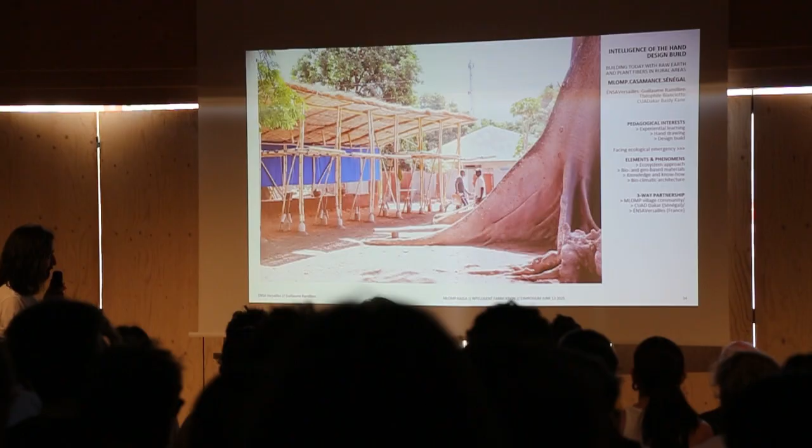So it's a three-way partnership that we've lived since many years now, with the Architecture School of Dakar in Senegal, our school here in Versailles, and now for 3 years with a village community in Senegal, a village called Mlomp Kassa.

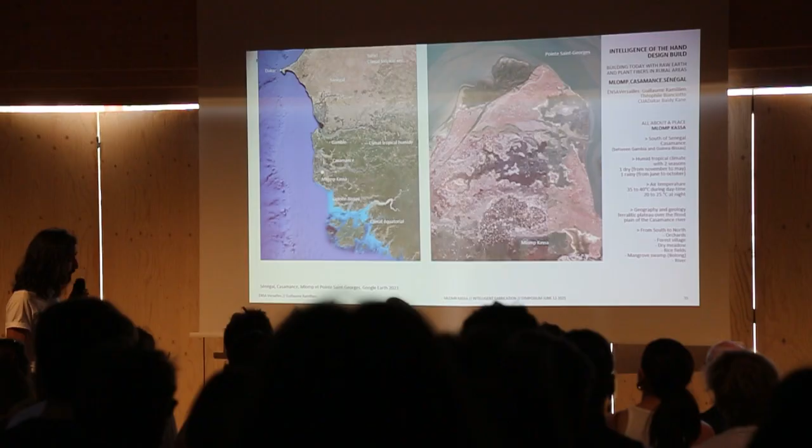With very high temperature, it can be 35 to 40 degrees in the daytime and 20 to 25 degrees at night. Also, the geography is interesting because it's a ferralitic plateau just above the Casamance River plain.

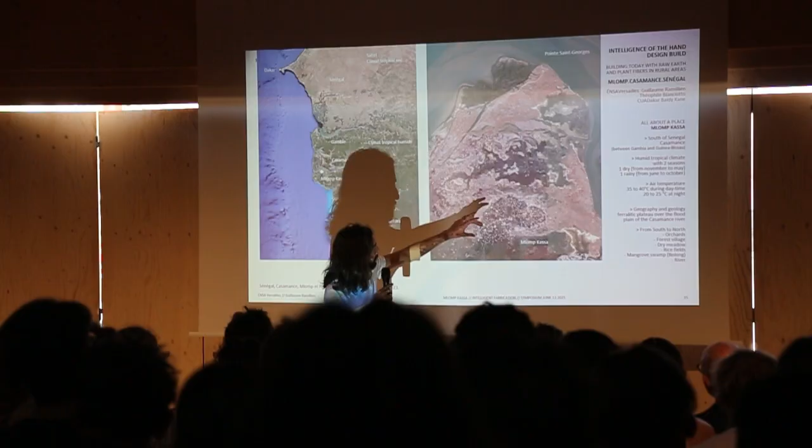So you have very different landscapes in a very small area: orchards, this forest village we work in, dry meadow, rice fields, and mangrove swamps nearby the river, they call it Bolong, and the Casamance River.

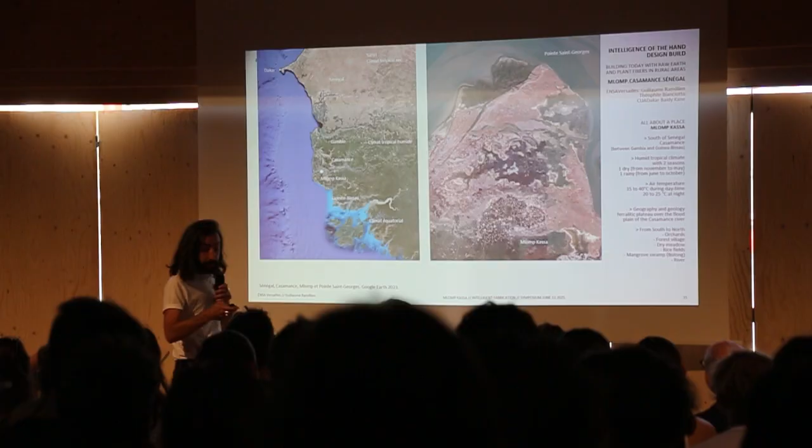Actually, it's not really a village, but a kingdom made of 5 villages. They have a king. It's called the Pays Kassa, it's the cradle of the Diola ethnic group and culture, which is very interesting.

Actually, they call themselves Christians, but only on Sunday morning. The rest of the time they are animist, so it means a very deep environmental culture and knowledge, very interesting for students. It's a rare place, living of farming and fishing, very simple.

And there are some very strong constructive traditions with local materials like raw earth and plant fibers. That's why we work with them.

So the idea is really to learn from this, now, in the context of global warming and ecological climate crisis. It's also a place that has a very unique architecture, very interesting with raw earth.

These 2-story buildings are unique, built with a technique called banco, what we call bauge in France. It means raw earth used in a plastic state, stacking layers, then cutting it so it's straight.

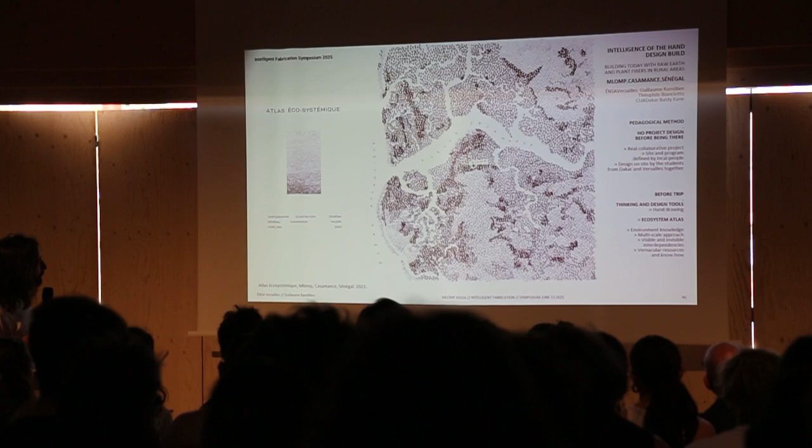So what we do before the trip is meet with students, thinking about design tools with hand drawing, with 2 topics: first, an ecosystemic atlas about this environment and the visible and invisible interdependencies that exist in that place, and also an architectural corpus. That's the next one.

So students can discuss formal and vernacular architecture. It can help them understand this bio-based and geo-based constructive culture.

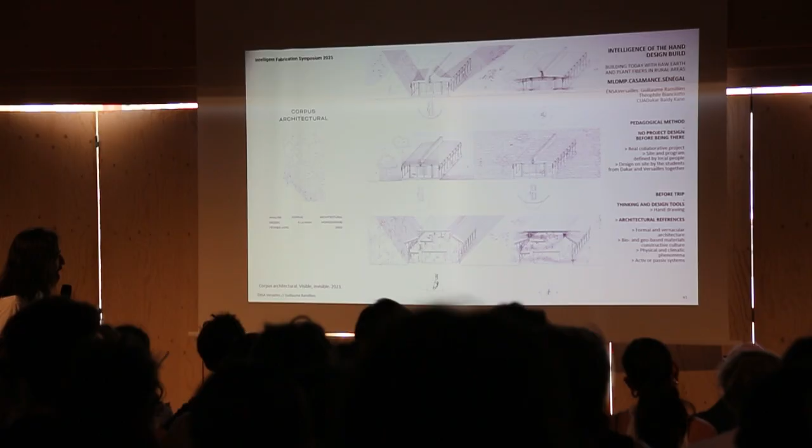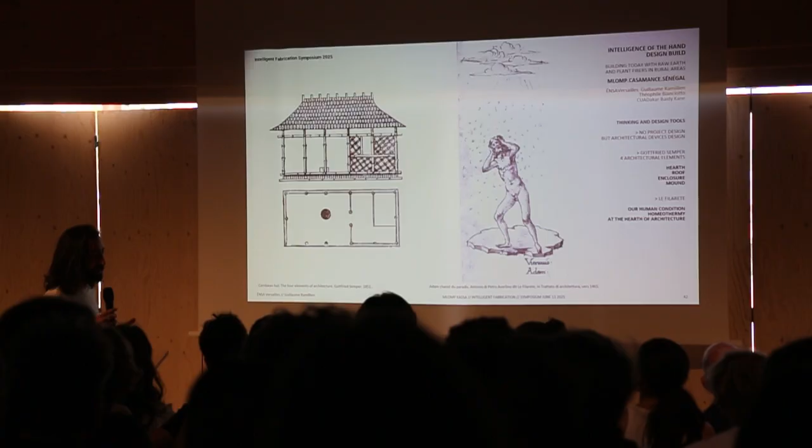So based on these two theoretical aspects, thinking and design tools, we do not design a project, but they design some devices based on this approach: 4 elements - hearth, roof, enclosure, and mound - linked to this idea of the human condition, which is homeothermy at the hearth of architecture.

So they work on these architecture devices, linking hearth, roof, and enclosure to elements: sun, air, water, and earth, and the climatic phenomena associated, like radiation, conduction, evaporation, convection.

When we are on site, everything is made within 2 weeks: 4 days conception, 8 days building, 1 day celebrating. The first 4 days define the site and program for the local population. Students don't know what we're going to do before being there.

We make some visits of the architecture to find and prepare the building materials all on site, then design the project with the 2 schools in an iterative process. That's what we did 3 years ago, a small market hall.

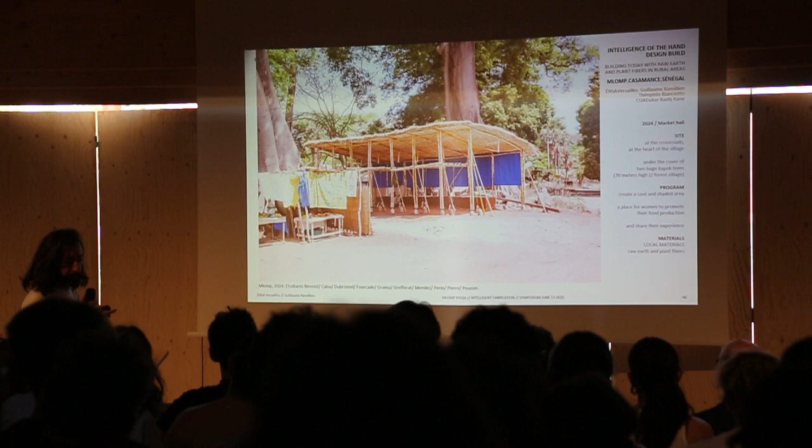Here you can see the size of those huge trees, which can be like 70 meters high. The whole forest village is under this cover.

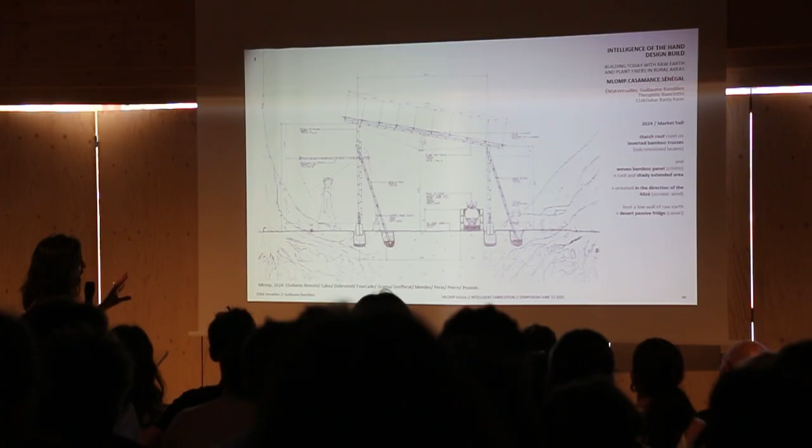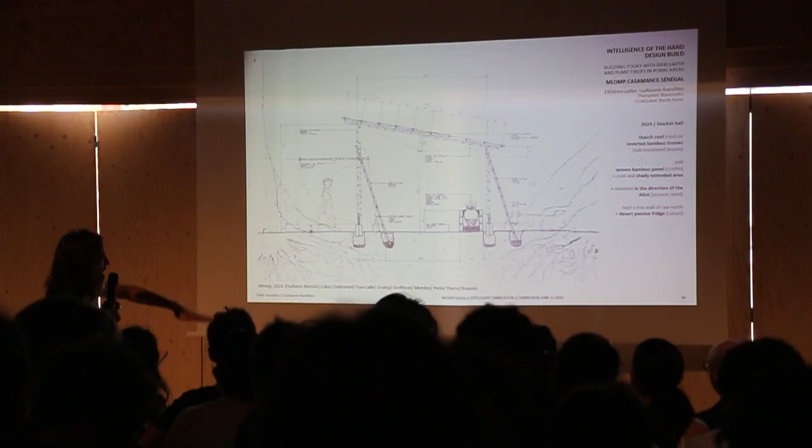Something famous in Senegal, the crintin. It's an extended shady and cool area around it. There's wind so you get some fresh air, and there's also a desert fridge, a very vernacular thing in Senegal called the canari, which is a passive fridge.

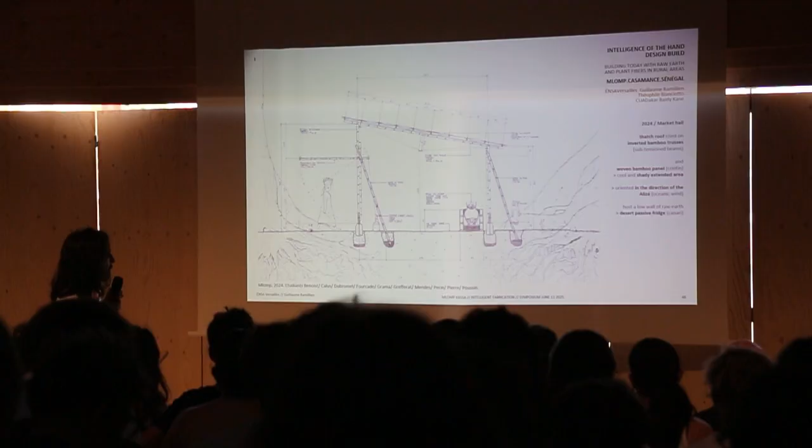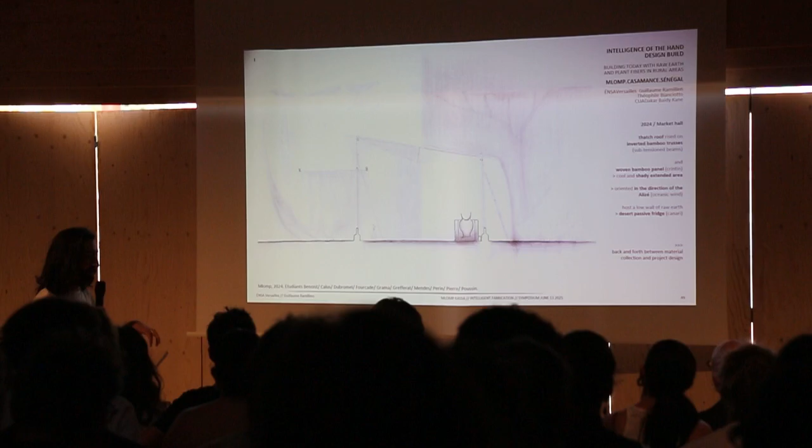There you can see the students collecting material: first of all, raw earth extracted from the building site, and bamboo collected in the forest.

Students do everything from foundation to the roof peak in 8 days. Here they cast some concrete blocks for the foundation.

The water drums they have to drink from during the 4 days of conception. Everything is done on site.

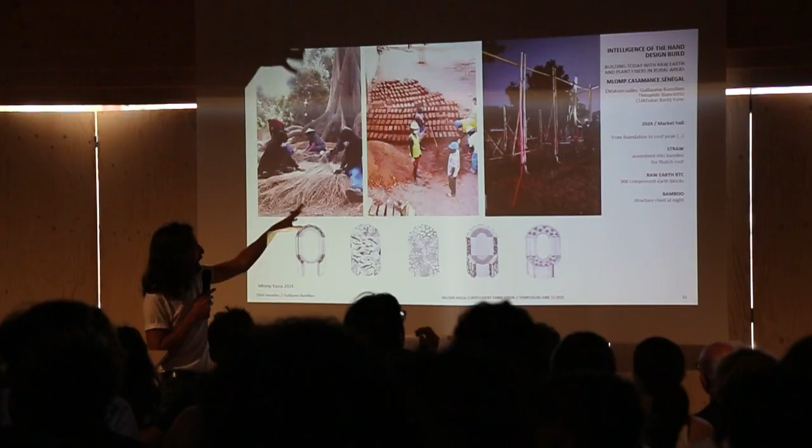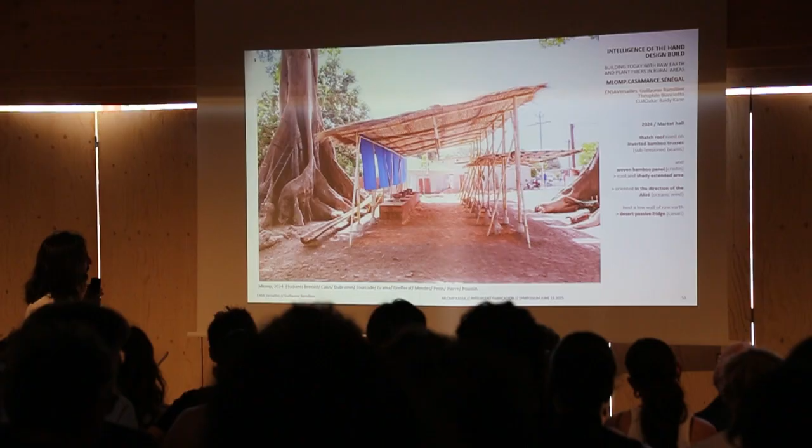And the structure that you see on the right side rises during the night. It's the only way to get some nice conditions to be sure it's here: the pavilion, the market hall.

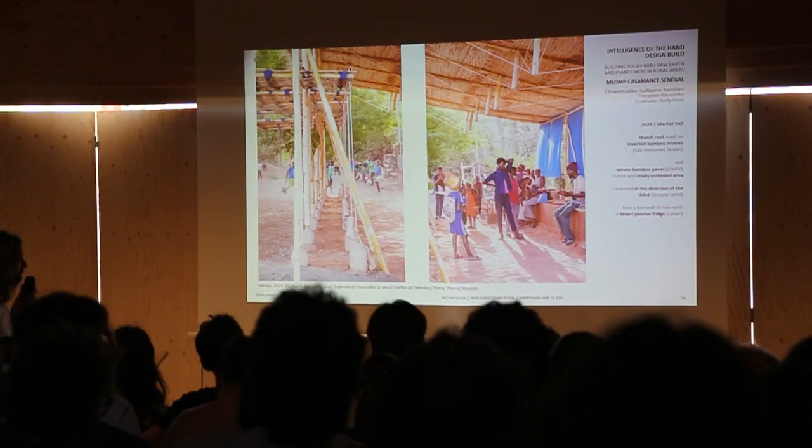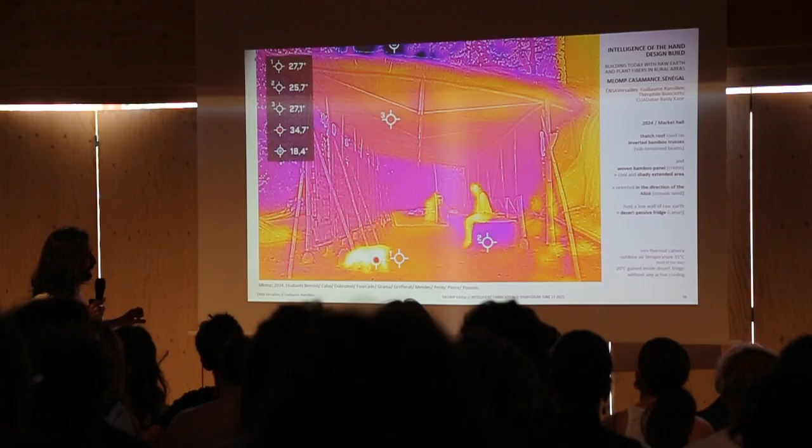There is a picture taken with a thermal camera at the end of the day, so maybe the outdoor temperature is around 35 degrees. As you can see, it's around 20 degrees inside the desert fridge, with no active cooling. That's what putting the roof does and prevents from radiation.

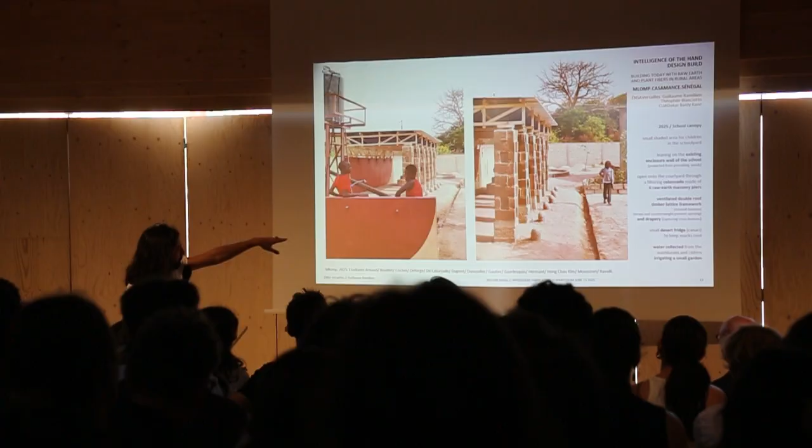Water is also collected from the roof of the shelter, also from the water basin, and it's led to a small garden south of the school canopy, so in the future it will also be a protection.

As you can see, the structure also uses counterweight struts to prevent the uprising. It's more about tension than gravity in that kind of building.

There is also a small desert fridge, same as last year, with the same exercise using a thermal camera. It's a picture taken at like 40 degrees in the air.

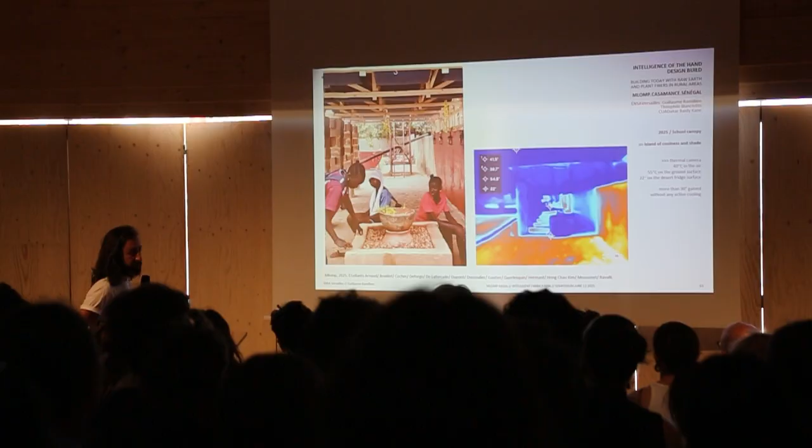As you can see, more than 55 degrees on the ground surface, and we have 22 degrees on the surface of the desert fridge. That means more than 30 degrees difference, once again without any active cooling, so the snack for the children can be kept cool.

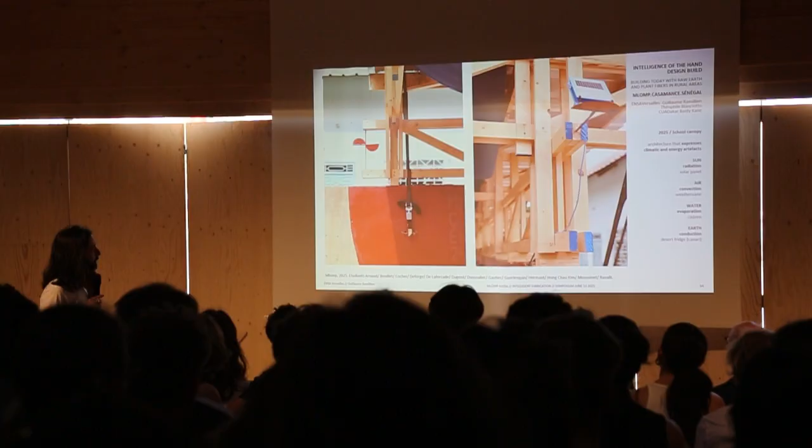We also work with the students to make an architecture that expresses those climatic and energetic artifacts: sun with a small solar panel, convection and air with this weathervane, water as you've seen in the previous picture, and earth, of course, with the desert fridge. That's what we've done.

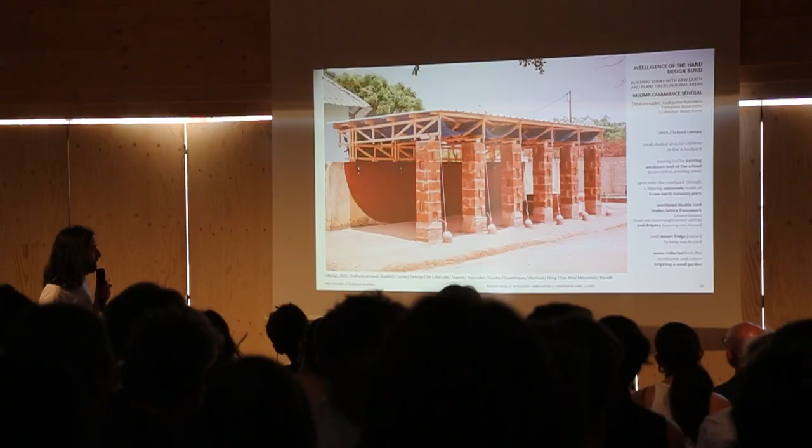And also the project on both sides of the walls, the schoolyard, but also the kindergarten just adjacent, offers also a small shady area with a bench for very small children.